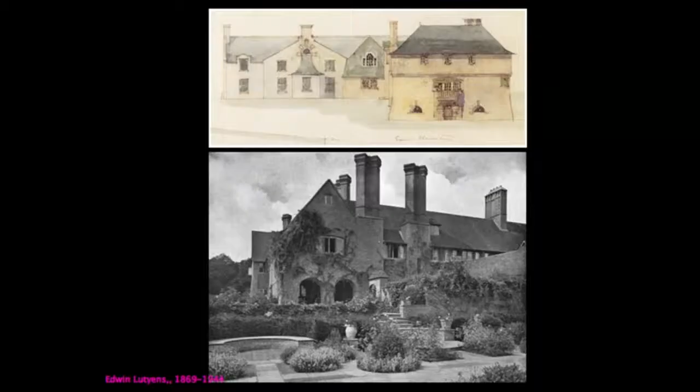In the past, before air conditioning, we had thick walls. The thick walls are great for insulation. It keeps the interior very cool during the summertime and warm during the wintertime. And the small windows were also very good because they limited the amount of temperature transfer between the interior and exterior. Then in about the 1930s, with the advent of plate glass, rolled steel, and mass production, we were able to make floor-to-ceiling windows and unobstructed views, and with that came the irreversible reliance on mechanical air conditioning to cool our solar-heated spaces.

Over time, the buildings got taller and bigger, our engineering even better, so that the mechanical systems were massive. They require a huge amount of energy. They give off a lot of heat into the atmosphere, and some of you may understand the heat island effect in cities, where the urban areas are much warmer than the adjacent rural areas. But we also have problems that when we lose power, we can't open a window here. And so the buildings are uninhabitable and have to remain vacant until that air conditioning system can start up again.

Even worse, with our intention of trying to make buildings move towards a net zero energy state, we can't do it just by making mechanical systems more and more efficient. We need to look for something else, and we've gotten ourselves a little bit into a rut. So what do we do here? How do we dig ourselves out of this hole that we've dug?

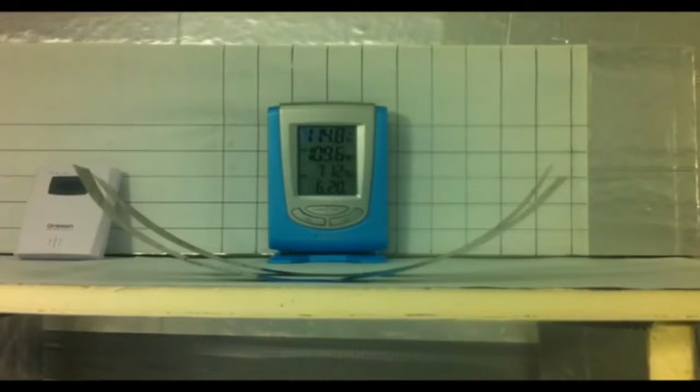And this gets me back to my research. What I propose first is looking at a different material palette to do that. I currently work with smart materials and a smart thermal bimetal. We call it smart because it requires no controls and it requires no energy, and that's a very big deal for architecture. It is a lamination of two different metals together. You can see that here by the different reflection on the side. And because it has two different coefficients of expansion, when heated, one side will expand faster than the other and result in a curling action.

So in early prototypes, I built these surfaces to see how the curl would react to temperature and possibly allow air to ventilate through the system. And in other prototypes, I did surfaces where the multiplicity of having these strips together can make bigger movement happen when heated. And I currently have this installation at the Materials and Applications Gallery in Silver Lake, close by, and it's there till August if you want to see it.

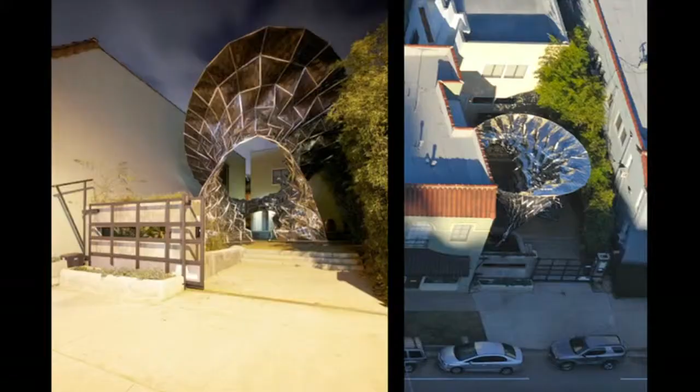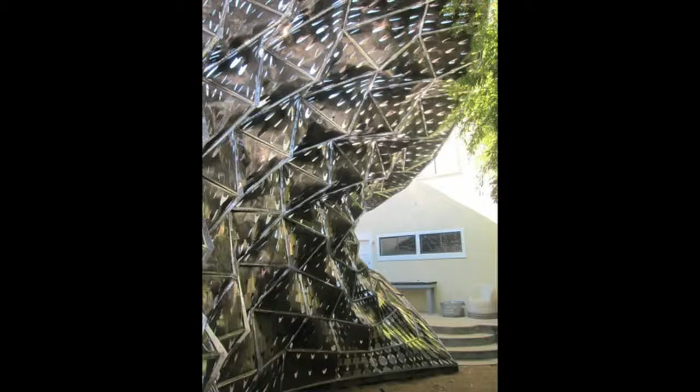It's called Bloom, and the surface is made completely out of thermal bimetal. And its intention is to make this canopy that does two things. One is it's a sun shading device, so that when the sun hits the surface, it constricts the amount of sun passing through. And in other areas, it's a ventilating system, so that hot trapped air underneath can actually move through and out when necessary.

You can see here in this time-lapse video that the sun, as it moves across the surface, as well as the shade, each of the tiles move individually. Keep in mind, with the digital technology that we have today, this thing was made out of about 14,000 pieces, and there's no two pieces alike at all. Every single one is different.

And the great thing with that is the fact that we can calibrate each one to be very, very specific to its location, to the angle of the sun, and also how the thing actually curls. So this kind of proof of concept project has a lot of implications to actual future application in architecture.

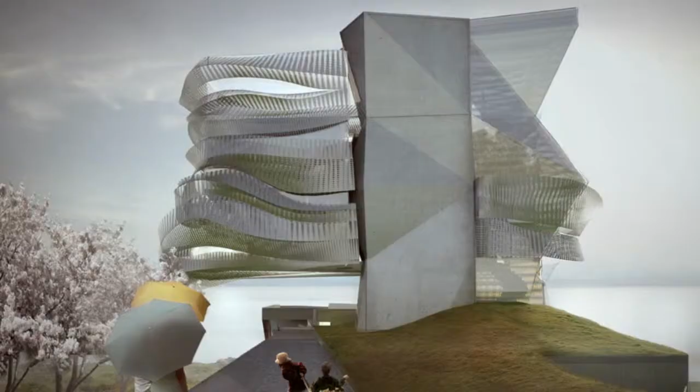And in this case, here you see a house that's for a developer in China, and it's actually a 4-story glass box. It's still with that glass box because we still want that visual access. But now it's sheathed with this thermal bimetal layer. It's a screen that goes around it, and that layer can actually open and close as that sun moves around on that surface. In addition to that, it can also screen areas for privacy so that it could differentiate from some of the public areas in the space during different times of day.

And what it basically implies is that in houses now, we don't need drapes or shutters or blinds anymore because we can sheathe the building with these things as well as control the amount of air conditioning you need inside that building.

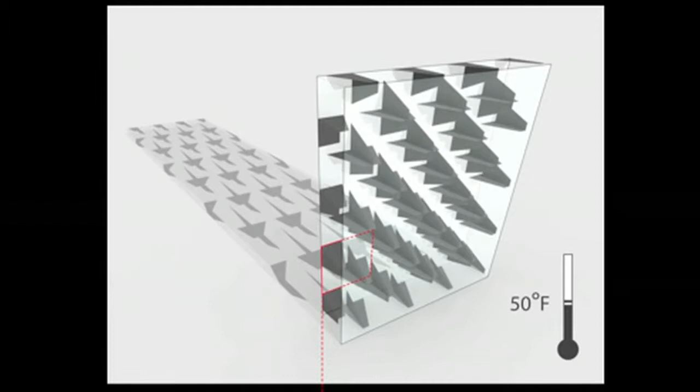I'm also looking at trying to develop some building components for the market. And so here you see a pretty typical double glazed window panel. And in that panel, between those two pieces of glass, that double glazing, I'm trying to work on making a thermal bimetal pattern system so that when the sun hits that outside layer and heats that interior cavity, that thermal bimetal will begin to curl.

And what actually will happen then is it'll start to block out the sun in certain areas of the building, and totally if necessary. And so you can imagine even in this application that in a high-rise building where the panel systems go from floor to floor up to 30, 40 floors, the entire surface could be differentiated at different times of day depending on how that sun moves across and hits that surface.

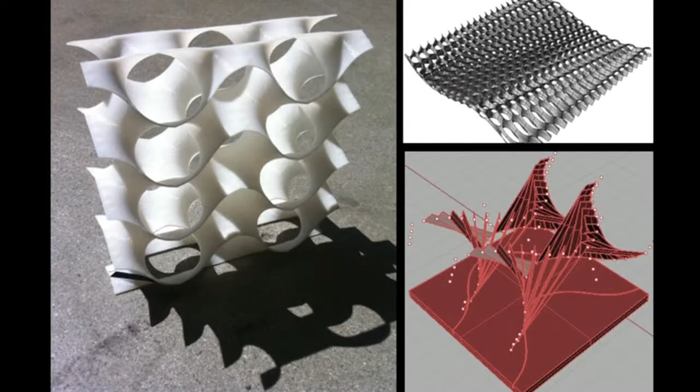And these are some later studies that we're working on right now that are on the boards, where you can see in the bottom right-hand corner with the red, it's actually smaller pieces of thermal bimetal, and we're trying to make it move like cilia or eyelashes.

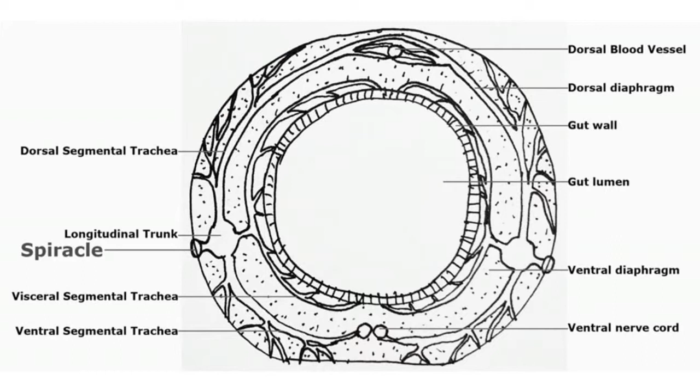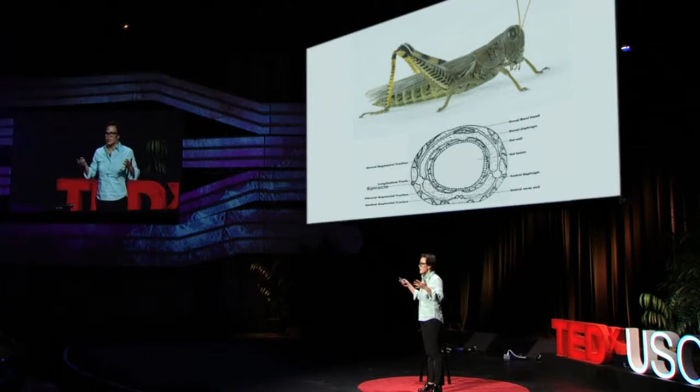This last project is also a component. It's the influence, and if you have noticed, one of my spheres of influence is biology, is from grasshoppers. And grasshoppers have a different kind of breathing system. They breathe through holes in their sides called spiracles. And they bring the air through, and it moves through their system to cool them down. And so in this project, I'm trying to look at how we can consider that in architecture too, how we can bring air through holes in the sides of a building.

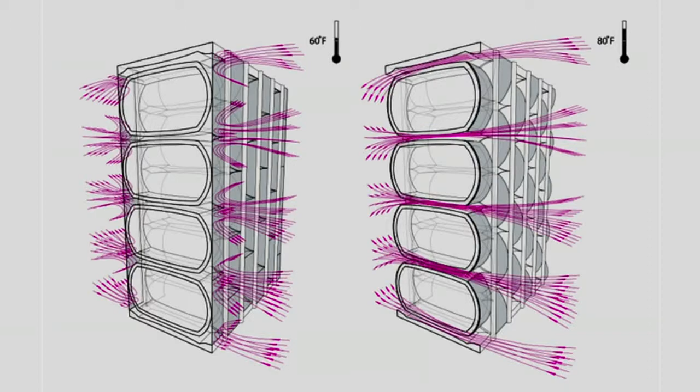So those are two different components that I'm working on. And again, it's a completely different thing because you can imagine that air could potentially be coming through the walls instead of opening windows.

So I want to leave you with one last impression about the project or this kind of work in using smart materials. When you're tired of opening and closing those blinds day after day, when you're on vacation and there's no one there on the weekends to be turning off and on the controls, or when there's a power outage and you have no electricity to rely on, these thermal bimetals will still be working tirelessly, efficiently, and endlessly.